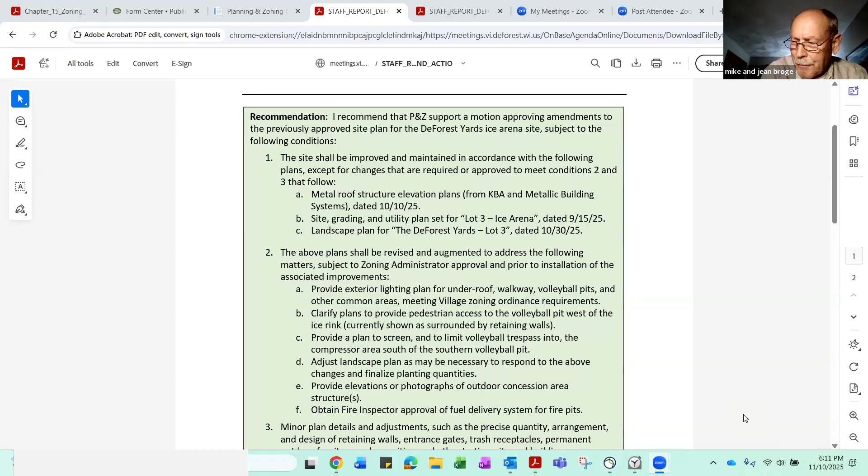Thank you. Not sure who to address this to, Luke or Claudia, perhaps. It was difficult for me to go through the drawings and really identify a couple things, so I wonder if I could ask for some clarifications. One would be roof drainage, as to how that roof is drained and where the water goes. Another question is, is there lighting under that canopy? And if so, what is it - is it a cutoff type lighting, or just what?

And thirdly, it would have been, I think, beneficial, at least to me, to see a section that included the berm. I didn't see one in there, and it would have been helpful just to get an idea as to what that will look like from Highway 51.

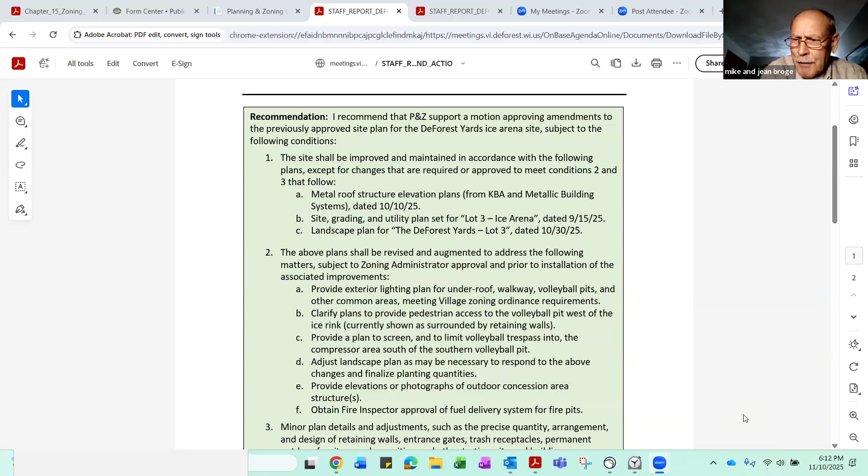Probably Luke, if you're guessing - yeah, I can answer the first two. So going back to the original, when we did this outdoor site plan, we had enough for everybody to feel comfortable. But in discussions it was always going to be a more detailed future piece depending on timing. So I think this is the more detailed piece of it. We've added quite a bit of landscaping and all the details of the fire pits and different things like that. And the roof was always kind of a phase 2 type piece, but we're just moving it along a little bit quicker.

The drainage piece - the roof has the same gutter system as the indoor rink, and it ties directly into the storm sewer. So from a site utility stormwater position, it's exactly the same, roof or no roof. It would have been, whether we had the downspouts or not, because the whole system was pitched into the storm sewer. So there is no change. And we confirmed this with Vierbicher too - well, Mark did, I knew the answer, but he confirmed with the actual engineers. So all of the roof water is in the same position as it was with or without a roof. But we did go around and we're tying in the roof drains directly hard piped, so it's actually a better situation, because all of that roof water will hit the downspouts and then go directly down, whereas previously without the roof it would hit the surface and then eventually work its way there.

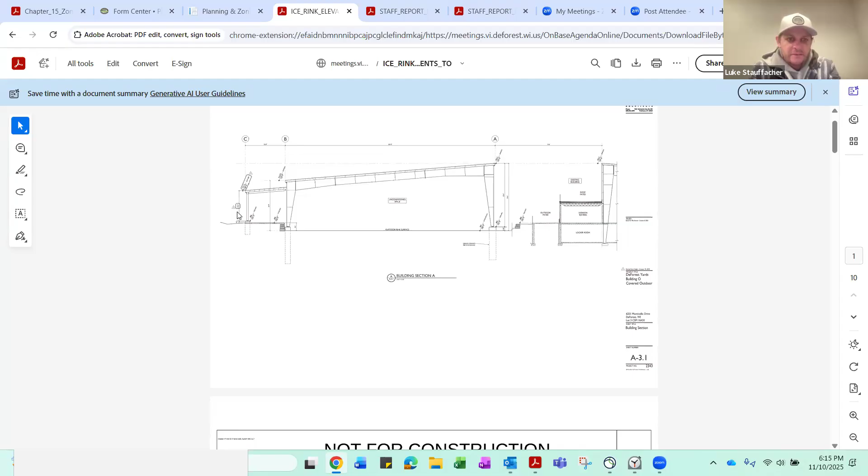The berm, you can see that arrow floating around. That berm probably sits around the stage is, I'm quizzing myself here, like 17 to 18 feet on the low side. The berm is probably 12, 13 feet above at stage level. So you won't really see much, the berm covers a good chunk of that.

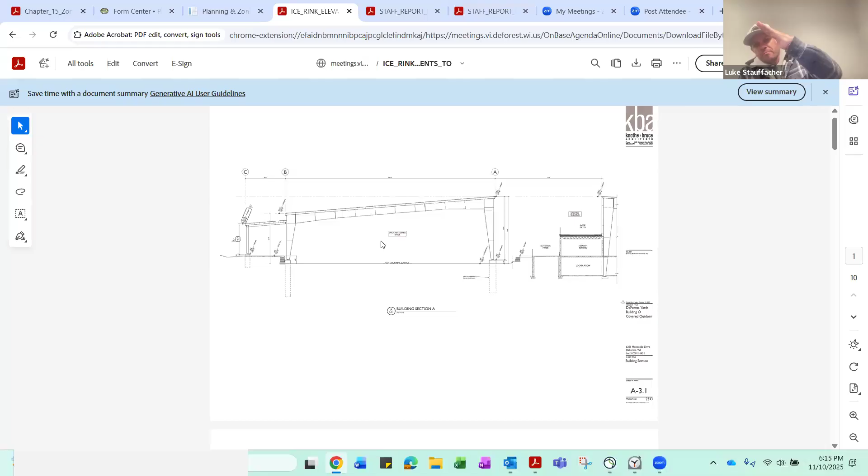Now, of course, as you go up, you'll see the roof line. But what we did is we actually created a nice little structure around the stage where the backdrop of the stage is the berm. And we did some real nice landscaping, limestone in there. So from the user group's position, we've got like a 200-foot, 4-foot wall of limestone across the whole thing. And then at the stage level, we have another, I think 3 or 4 high block of limestone behind the stage section. It's a really cool looking design from there.

And then from the 51 level, I don't think you really see a whole lot because the berm and the trees are above it. When it's all done too, we'll probably plant a few more trees just to give it a little bit more protection for noise and stuff too.

Perfect, Luke. Thank you so much for that answer.

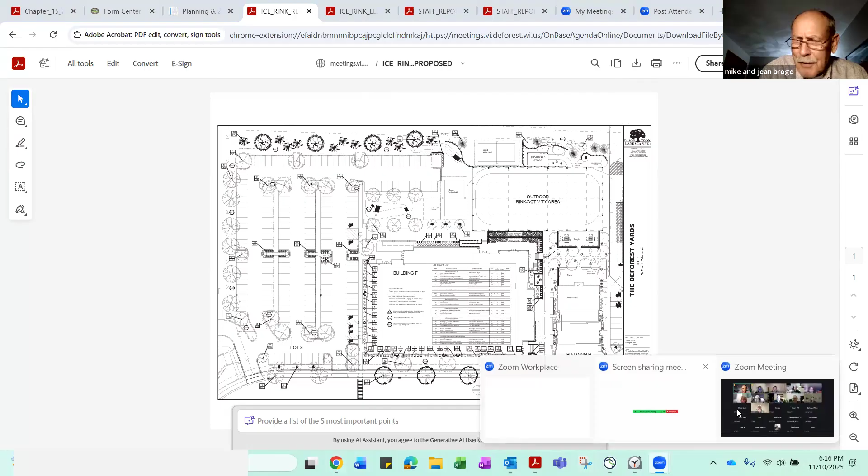So just to confirm on the lighting, and the reason I'm asking that question is really for the lighting spill around the edges. You're looking at kind of a cutoff type fixture. Is that what I heard?

Yeah, so it'll be, it kind of has like a rectangle fixture and then has sides on it. I guess the best way I can explain it, and we can get some more technical data, but if you go in the indoor rink and you were to shut all the perimeter lights off on the outside, all you see is the ice rink lit up. This would have that effect.

Okay, so all the light is shining down onto the rink surface. Very good, thank you very much.

Thank you, Mike, and it sounds like you're done. But Lisa, then you're the next hand up.

I think I've got a few questions as well for Mr. Stauffacher. With regards to the relocation of the performance stage, I wonder if we could take a look at that map again, and then the proximity to homeowners or residential, because with that relocation to the south end of the outdoor rink, I'm trying to envision where that would be and what sort of impact that might have on local residents who live in that area. So I'm wondering if we could take a look at the map a little bit and get a better feel for that piece.

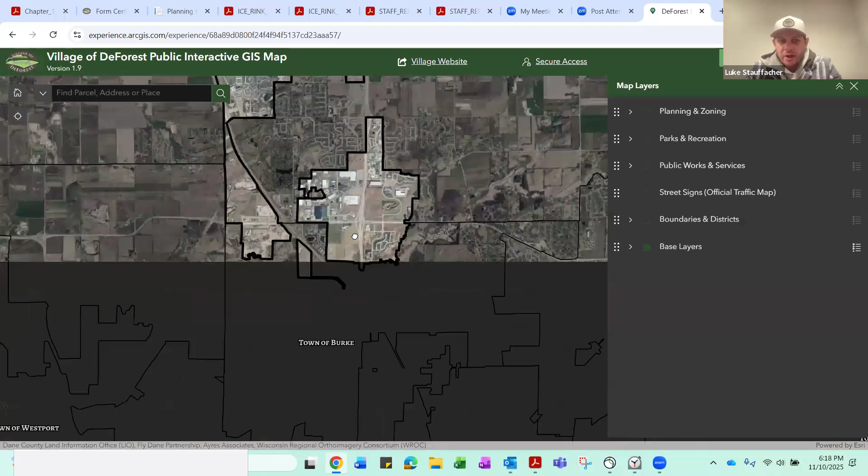Yeah, we are significantly away from any homes. We actually moved it, it's farther away from homes. I don't think it was going to be an issue regardless, but we moved it back into the berm. Yeah, this is a better map.

Right where that kind of lighter sand is, right there is the location. And what we're missing here is there is a 59 unit building going up. I guess a better way to put it is this whole site, by the time the stage is functioning, is fully encompassed with our buildings. So there's protection on all levels from the neighborhood.

Yeah, that arrow is where the main rink is. And then I forget the lots, Brandy, but I know it's the 59 unit, lot 3. So right where your arrow is, that 59 unit is going up right now. We're paying for the building permit tomorrow. We had an early start on it. So that building, that structure will be up before the stage is functioning too.

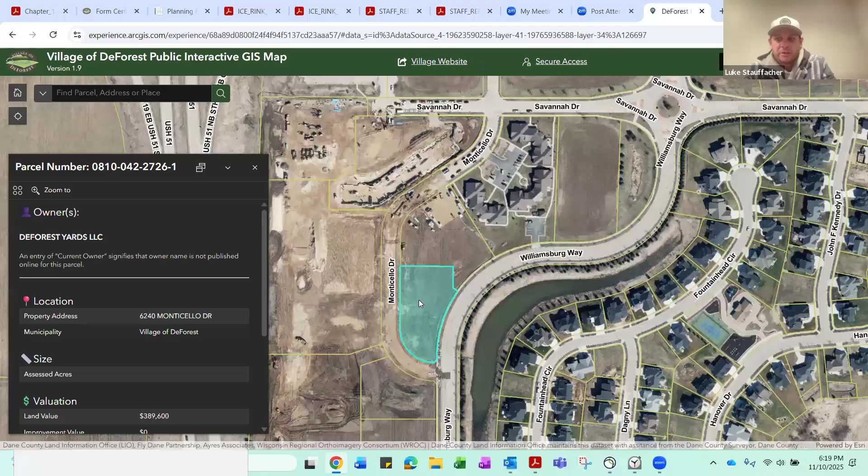And then the lot below that has its building, that's the amenity building that's completed. And then Youngblood has started theirs. I think they're set for an April opening. So that gives you an idea on the protection from the neighborhood.

My other question was regarding the fine print on some of the schematics here. It indicates a metal roof on the ice arena, and I'm assuming a metal roof on the band pavilion as well. I'm curious about any acoustical treatments to dampen the harshness of the sound travel.

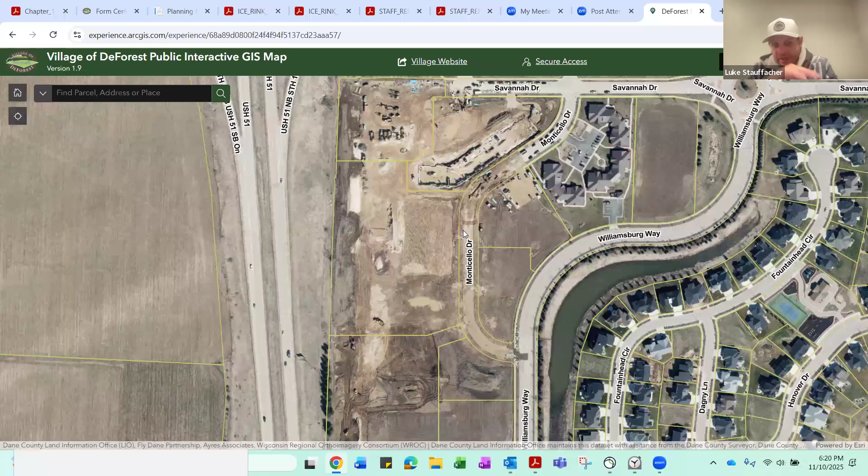The whole bottom underside has insulation, which we don't need thermally since it's open air, but we use insulation and then another layer of what I believe is called tactile material that goes on the underside of the metal building, which should make an impact. Okay, thank you, those were my questions.

Is there anybody else with questions or concerns to discuss? I do not see any hands, but if you have anything please raise your voice. There's also an opportunity for somebody to make a recommendation, so if anyone is willing, the staff recommendation is on screen right now.

I could make that recommendation. I motion to recommend that P&Z support a motion approving amendments to the previously approved site plan for the DeForest Yards Ice Arena site, subject to the listed conditions in this report.

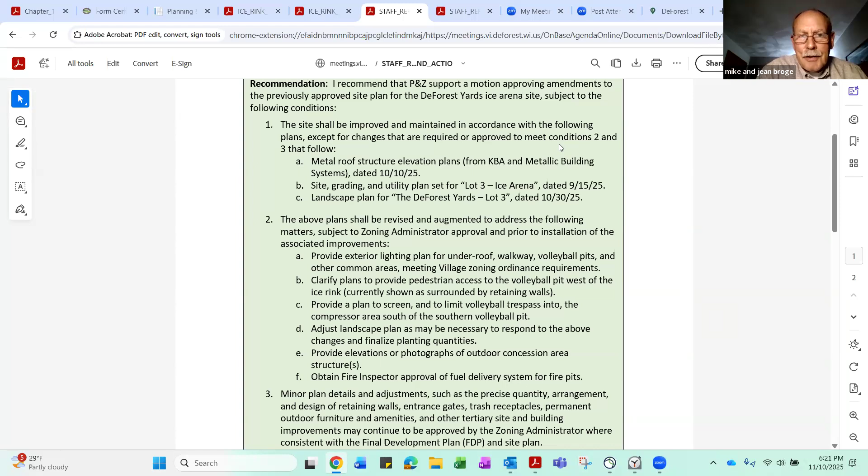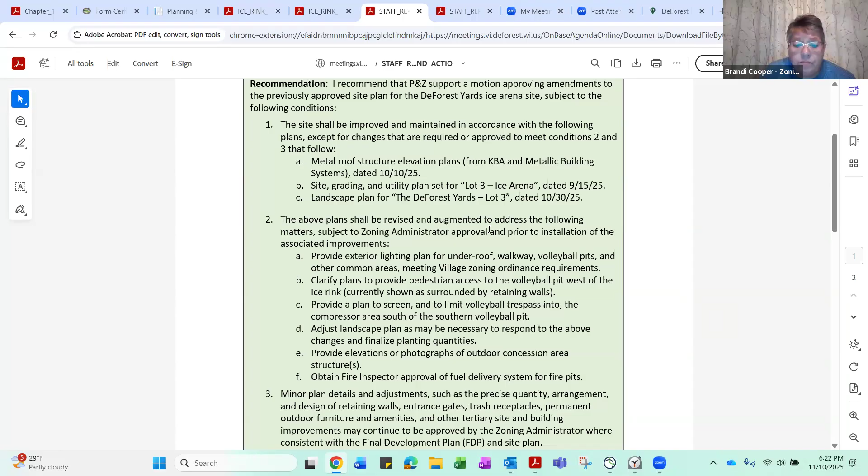Thank you, motion by Mike. Is there a second? I'll second. I think that was Jean. Is that the second? Yep, that's who I have too. So is there any further discussion or comments?

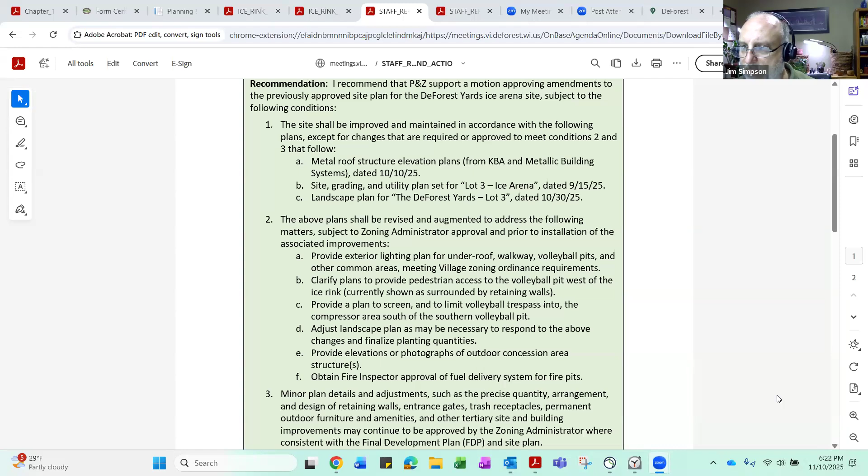Hearing none, all those in favor signify by saying aye. Aye. Any opposed? Motion passes seven to zero. Thank you very much, Luke.

Thanks guys, we're pretty excited we're doing this a little quicker than originally planned. It's all turning out pretty nice out there, and having the roof piece will be really nice for rain, snow, sun, all those events. It was a cost thing, but we decided to go ahead and do it. The end result, I think, will definitely be a value add. Appreciate you guys' support. They'll be back in touch on other stuff, so I'm sure you'll have plenty more questions for me on other matters. Thanks for your time.